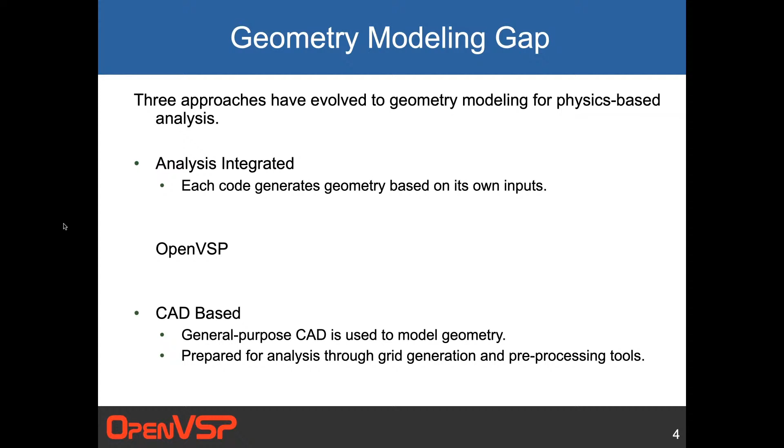Now, there's also typically in practice a lot of analysis fidelity holes, and there's many reasons why this exists in practice and in industry, but for the most part, an organization will invest tremendous effort in getting a single model to analysis workflow working, and there's huge investments in that, and your fidelity is at least limited, if not chosen, by the geometry model you have, and it's hard to change that fidelity later.

And so what this means is that a design engineer ends up choosing the analysis tool that they're using, not based on what's the right tool for a given job, but by which tool is fully automated and integrated in our workflow? Which tool do I have the most investment in? And then every time you need to use something, you end up using that same tool.

And what you end up with is, instead of a densely populated fidelity discipline matrix where you have multiple fidelity choices you can make at every discipline throughout the design process, you've just got one here and there. And due to those sparse choices, you don't get to make the right tool choice independently as you're working.

Now, there's many possible representations of a geometry. Again, in CAD, there's just sort of one representation. But there's many ways as engineers we think about the shapes. You might represent a wing as a stack up of its airfoils, or maybe a wireframe, or maybe a smooth surface representation. It might be an unstructured isotropic triangle mesh. It might be a coarse triangle mesh.

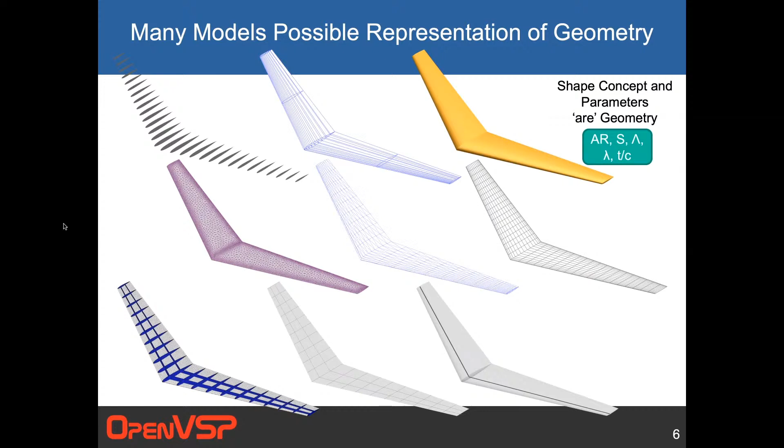And in VSP, the true geometry is the parameters, the aspect ratio, the area, the sweep angle, the taper ratio, the thickness to chord. These parameters are the geometry. And from that, we generate these different shapes. And that's a little bit different than the way CAD would work.

Now, representation has a lot to do with the fidelity of analysis you might use. A thin potato chip type representation for a vortex lattice, a surface model for a panel code, an unstructured surface mesh for CFD that then grows to a volume mesh. And this representation very much has to do with the fidelity of the tool, but fidelity does not necessarily correlate directly to the design stage. And this is a mistake, a confusion that a lot of people have.

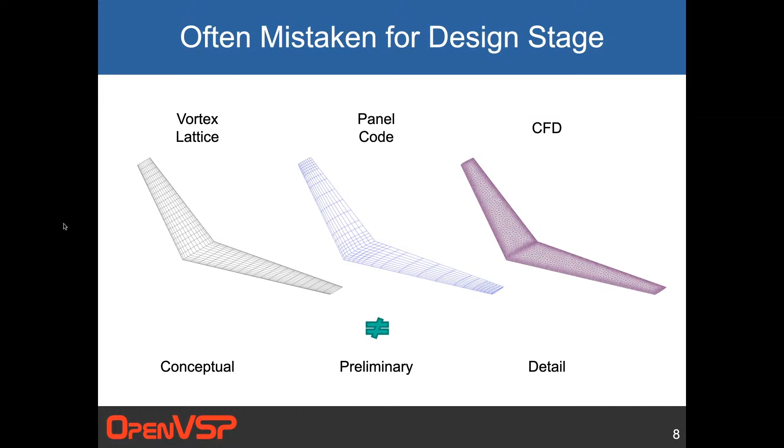But the fidelity does not increase monotonically as you go through design. Sometimes you need to use a high fidelity tool early in conceptual design, and sometimes it's entirely appropriate to use a low fidelity tool very late in the detailed design process. And although that may seem counterintuitive and people don't realize it, this is a well-established idea.

In the preliminary design, the parameters get a little bit more detailed. The requirements get more detailed. You're making more subtle choices, camber, twist distribution. You're looking at the major loads and stresses. You're zooming in a bit. And then finally over to detailed design, where you're going all the way to what it takes to actually produce and make. And you're looking at all of the very detailed stresses and the final stage.

And as I said, you might need to use a high fidelity tool in phase one. There may be parts of a design that need CFD in phase one, in the conceptual design. At the same time, when you're doing the local strength requirements, it might be appropriate to use handbook methods and just a sharp pencil and paper to do stress calculations, a very low fidelity tool in the detailed design phase. And we need to break this idea that fidelity increases monotonically with the phase of design. We need to be able to choose these independently.

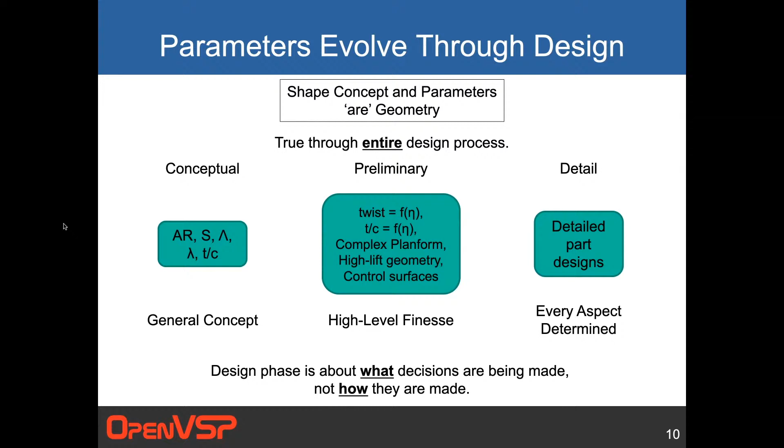In conceptual design, we have these high-level parameters with the general concept. In preliminary, we get some more finesse, things get a bit more detailed. And then in detailed design, every aspect is determined. Things really go further. VSP is totally appropriate, I believe, through the conceptual and into the preliminary design process. At some point in the preliminary to detail, it's appropriate to switch to CAD and not use VSP as your primary model. You may still use it for some of your analyses, but it's a point in time when you need to switch over. And again, the design phase you're in is about what decisions are being made, not how they're made.

VSP has come a long way over the years. I hope that introduction gets everybody warmed up and ready for this workshop. This is our 8th workshop. I don't know how many of you have been to them in the past, but VSP has been evolving at a rapid pace throughout these workshops and the years before. And we're now up to version 3.21.2.

At last year's workshop, we were at 3.18, and you can see this history going back. I will say that the development pace has been very, very fast. We've been making some progress here at Cal Poly. Justin Gravitt and his team at ESAero deserve a lot of credit for carrying the torch in development over these last couple of years through the SBIR they have with the Air Force.

I'd implore you to look at what version of VSP you're running. And if you're not running version 3.21.2, ask yourself why. And if there's not a really good reason, go ahead and update. There's many bugs fixed in every version, many features introduced. Obviously, only the newest version gets any support at all. So please update. There's no reason not to.

Since last year's workshop, here's a summary of the features that have been introduced. These are just the biggest, heaviest hitters. We'll be talking about a lot of these throughout the workshop, but one of my favorites is the smart input capability, where you can do simple math on the fly in VSP text entry boxes. We have the generic XSec capability so that you can have infinite flexibility on cross sections. VSP Aero has received major updates so that it now does fully general unsteady motion, including rotating blades. The GUI support in VSP itself for VSP Aero has been updated to support rotating blades and unsteady motion.

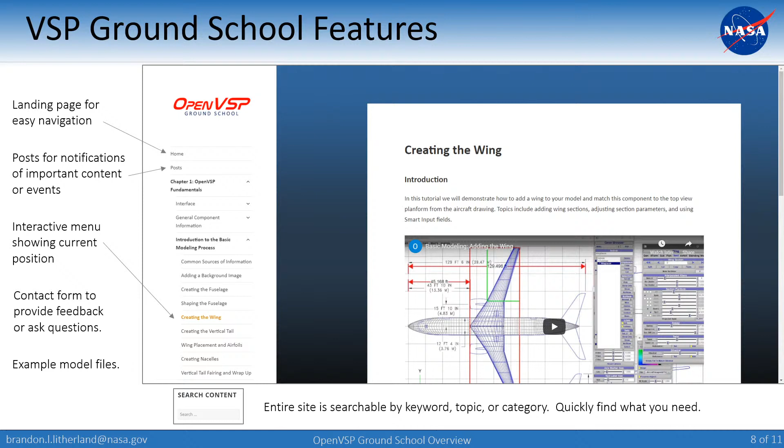Another handy feature is that this website is responsive, so it works with monitors and displays, tablets, or smartphones and other smart devices. Because it's designed to work this way, it uses active commands rather than the hover issue on mobile devices. So instead of having a menu where you hover and click on things, you actually have to interact with it in order for it to execute a command. This is not only useful for mobile devices and mobile menus, but it's also very accessible to folks who might have motor control issues, hearing problems, or visual impairments.

The VSP training website is only going to execute a command if you find it and tell it to do so. So it's really accessible, easy to use, and very intuitive.

Some things coming down the pipe pretty soon in the near term are fixing the subscription service notifications. Some of them work, but some email providers are filtering out emails from the website, and we're trying to get that chased down so that if you like, you can subscribe to the training material and it will send you a notification when new content is added. We'll also be wrapping up all of the Chapter 1 material in the fundamentals.

Over the next year, we're going to drastically increase production of content for Chapters 2 through 5, including a heavy focus on analyses and design intent. Expect a lot of material on VSP Aero, structures, getting things ready for CFD, and how to set up your model parametrically and link things together. We also want to start writing detailed procedures for those who don't want to follow along on a video and prefer to have it written out, and we'll put together practice exercises so you can exercise those core topics and reinforce learning.

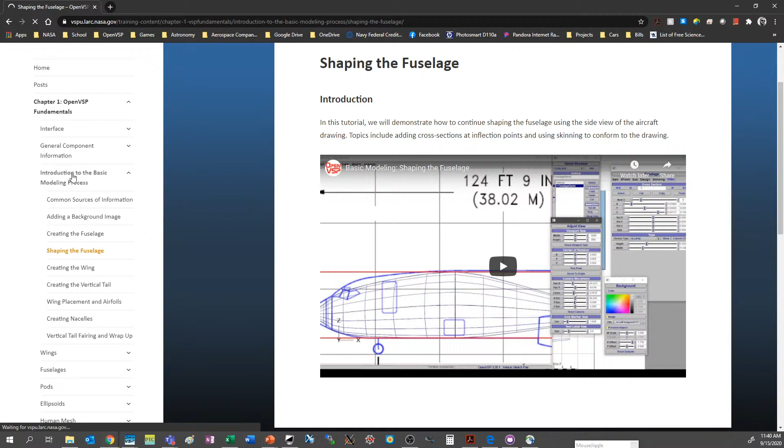And if you want to go, you can go to some of these subject or chapter processes. And if you just want to see what's inside, you can go there. And all of these have a summary of all of the various topics inside that chapter, as well as a link to all the other subjects in this chapter. So it's really easy to navigate around and see what you can get into.

But something else I wanted to demonstrate is that the website is, in fact, responsive. So if you drag the size of this to something quite small, you can see what it would look like in a mobile view. If you move it around and make it wider, that's what it would look like in a tablet, and here's your desktop view. So this website will respond to the size of the screen that you're looking at in real time, and it will set it up to have the best viewing experience for you. Drop the hamburger menu down, and again, it shows you where you are in the training.

So, I hope that was really useful. We're really proud of the Ground School website, and we know that it's got a ways to go. We're still working on getting that up and running, but hopefully everybody is able to use that. And what I'm going to do now is get ready to set up for the basic modeling tutorial, but I'm going to pause in case there are any questions. Rob or Justin, if there are some that you see that they need to ask, by all means let me know on the Teams meeting here, and I'll address that while I'm getting this set up.

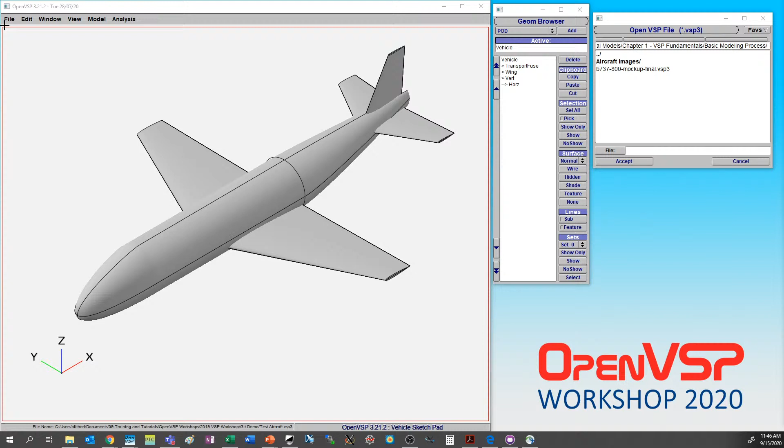So what we're going to do is take a quick look at what the aircraft would eventually look like here. Now, if we fit this to screen, this just happens to be an example transport aircraft that we pulled from online and publicly available information. So you can do measurements and you can match it. And it's an okay model. It's not perfect. It's certainly not to the CAD level, but for an OpenVSP model, this one isn't too bad.

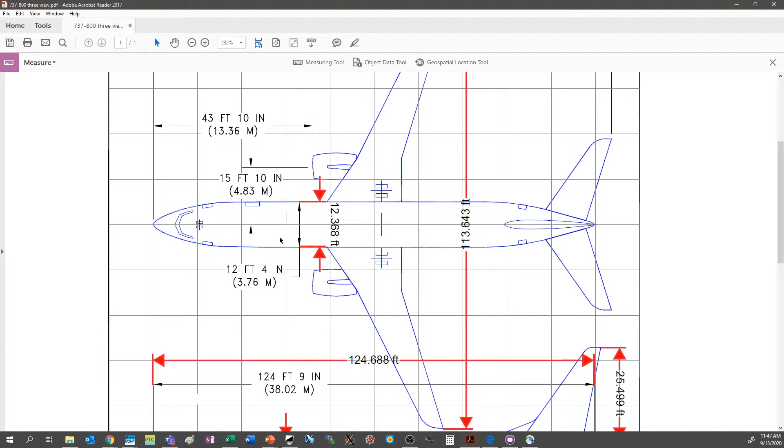So what we're going to do is just make a new model and start looking at how you would even begin to model something like this. And usually a great place to start is to find some publicly available information on the layout of your aircraft. Now in this case, I've pulled out a 3-view drawing of the aircraft, and in Adobe Reader, you have a measuring tool where you can click and drag and figure out measurements as long as everything is set to scale.

Now the way that you can do that is when you open it up, you go to your tools and a measure tool. You actually have to turn this on, and then you have various types and you'll get this crosshair. So if we were to click at this measurement point and drag this over, and you can hold shift, you can see that we can get something pretty close to what's documented. Now the reason that's already coming out this way is because I've set the scale.

So if we right click out here, you can say change scale ratio and precision, and you can see that my scale ratio is currently the measured 3 inches that it'll show you the first time you do this on your page, and you can set it to the dimension that you want. Now this is going to have a certain precision, and you can start to use this 3-view drawing to pull out dimensions in your model. So this is a really great place to begin.

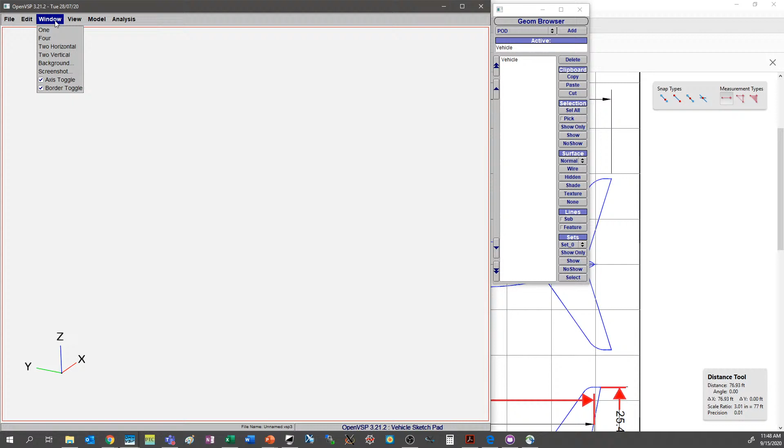Another really nice thing that we can do, if we go back to our VSP model, is we can go to Window and Background, and we can pick an image. So let's say we want to start with a top view. Okay, this isn't too bad. We have a nice outline of the fuselage. We've got our wing, our engines, our tails, everything's laid out for us. And if we want, we can add different background views.

So before we even add a component, I want to give a quick word on how you can interact with your workspace in a way that makes it very effective. So if you need to, you can scale these and make them bigger or smaller. If you happen to find that perhaps the image itself is not using the correct dimensions in one or the other because either it didn't come into the PDF correctly or a dimension is wrong, you can also give a different scale in width and height.

Now, if you go to Window, you can see that you have the option of 1 workspace or 4, 2, and 2. If you break this up into 4 workspaces, and we have all of these here, notice that everything cleared out, but this red box designates your active window. If you click Image, it's now going to put 1 image here.

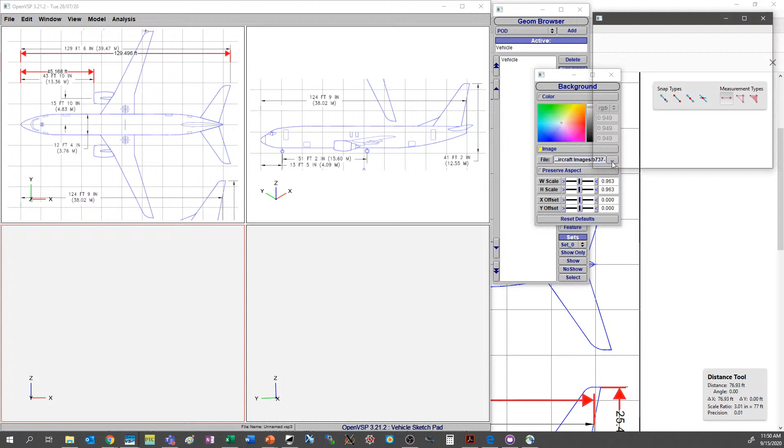You can click Image, and we can set this one, let's say, to a side view. Okay, we're happy there. Let's do this one. We want to do a front view. So you can see that the scale is a little bit different here because it got a hold of the background and it kind of smashed it because I told it to not preserve the aspect. We can fix that stuff later, but the point is that for each one of these active workspaces, you have control as if it was its own workspace.

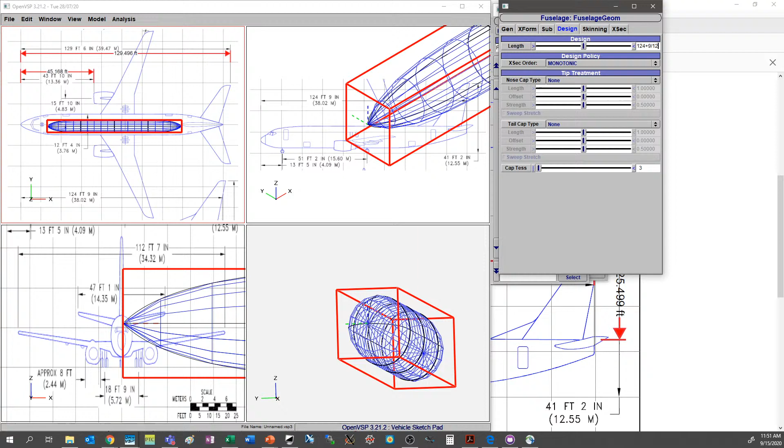So in this first, let's go ahead and add a fuselage component, and we're going to jump to a top view and try and line this up. Now, based on our model here, we know that our fuselage length is 124 feet and 9 inches. Okay, that's all well and good. Let's go to our fuselage design. We're going to say 124 feet plus 9 by 12 because you can do smart input math in the parameters now. Press enter and you have it the correct size.

And now we can start to line this up as needed. And then we can start playing around with cross sections because now we know one dimension lines up with the view that we want. We can start pushing cross sections around. We can start shaping it by hand if we want. So since I've shown you how to manipulate these in a 4-window scheme, let's go ahead and go back to a single window. And now we can kind of see a little bit more detail of what's going on.

So I am going to try and do this with my mouse, but let's say it doesn't like me very well and it's a little clunky. You can always go to View, Adjust, and you can take your zoom, collapse this down a little bit, and you can get some nice fine zoom control over this part and line it up just where you want to. Okay? So at this point, let's go ahead and get rid of Adjust View, go to the cross-section window, and start to play with a few of these.

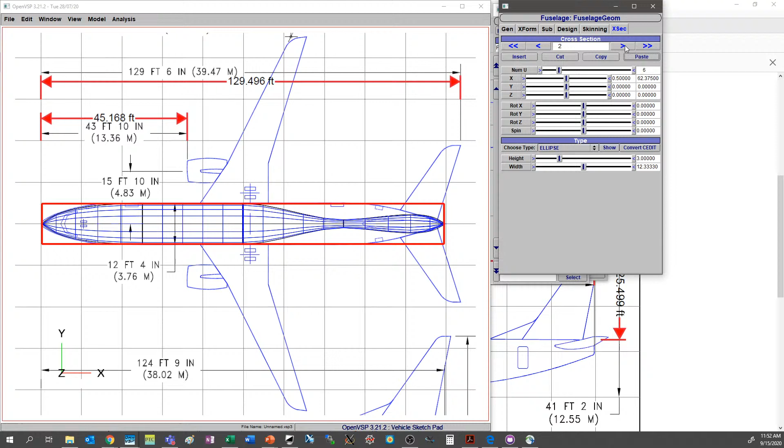So I'm going to start adjusting the width. And the nice thing is the width is given to me. It's 12 feet 4 inches. So I can just simply say 12.3333 and we're good. Go to the next one or even copy and paste. Okay, we're going to paste again. So now we have a nice width. We can play around with some of the skinning to get things to line up, but we're starting to get there. So next, let's go ahead and change the background to a side view.

And we're going to line this up again. We're going to jump to a left-hand view, set things up, maybe give it a little bit of zoom to try and line these things up. And we're just going to continue on. So if we adjust, we're going to move our zoom around a little bit, get things mostly lined up. And the point here is to just show you about what to do, not to really worry about all the little fiddly things. So we're going to go ahead and move this around. And for each of these cross sections, we're going to start to place where they need to go.

So let's say that for this one, we want to set our height. Let's give this a bit of positive Z. That's too open. If you click these little collapsible caret icons to either side of your slider, that's going to collapse the range. So you can see now that this is moving much more slowly than when I originally had it. So now I can do that, give it a bit more height. All right, now we're getting closer, and that's about 13 feet. That's not too bad. So let's go ahead and set these to 13 feet as well. Give it some Z.

Okay, looking pretty good. All right, so rather than go through all the little details of trying to get the fuselage exactly right, I think by now you get the idea. So we're going to leave the fuselage and we're going to start dealing with how to shape a wing. So in this case, what we're going to do is, as a child of the fuselage geometry, you see we have it selected there. We're going to click on wing and we're going to add.

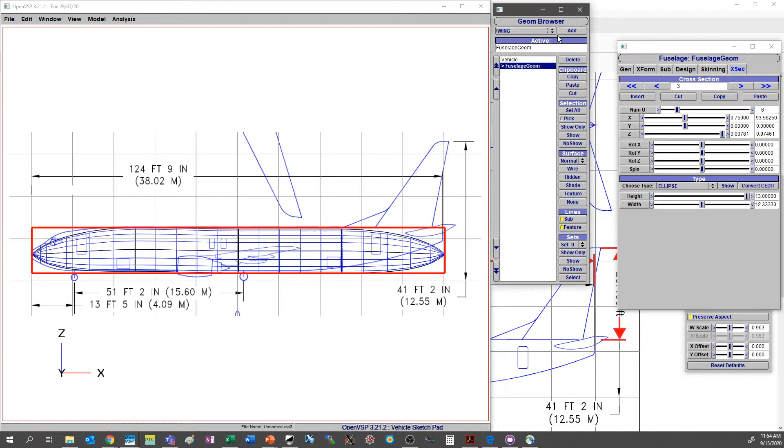And just because we want to, we're going to say that it's attached to this parent in the component location, and we're going to leave the rotation alone. So let's go ahead and press F5, jump to a top view, and we're going to adjust our background here and bring up that top view again. So now we've got our model lined up and we can start to think about placing our wing.

So as a quick word and a little tip in VSP, if you have a custom view that you really like, say for example a zoom and a rotation that fits your background exactly the way you want to, you can hold Shift and press F1, F2, F3, or F4, and OpenVSP is going to remember that camera orientation, including the zoom and the center of reference for you. So you can press F1, F2, F3, F4 and quickly snap back to that preset view.

If you have 2 or 4 of these workspaces open, you can have up to 16 different saved views because, again, each one of those workspaces treats itself as if it's its own workspace. Okay? So that's a handy little trick for when you want to jump around and get a nice clean view.

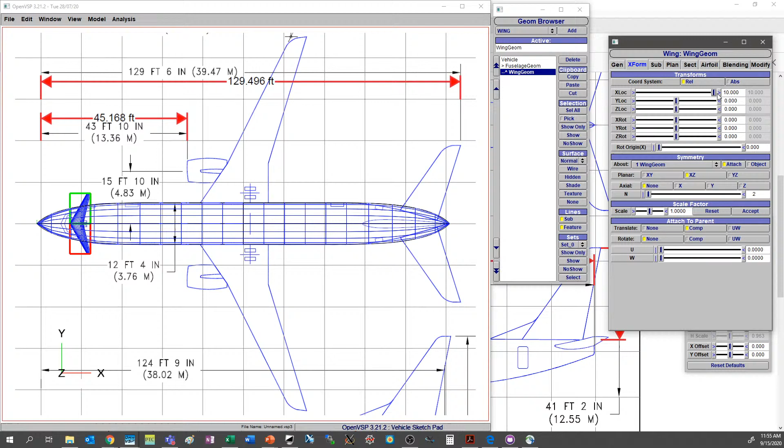So in this case, we're going to go ahead and start moving this wing back to where we think it needs to go. And if we look at our reference drawing, our wingspan from tip to tip should be about 113.6. So that's as measured. In this case, it's saying it's 112 feet 7 inches from tip to tip. So let's use the reference drawing rather than what the measurement on the paper says.

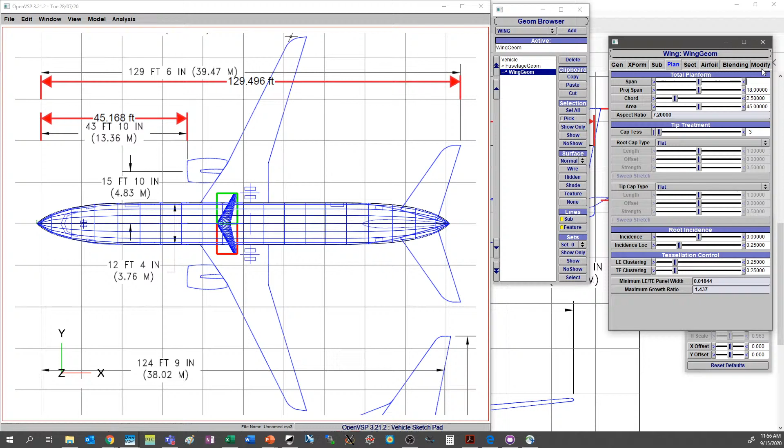So we're going to set our wingspan under plan. We're going to say it's 112 feet and 7 inches. Okay. So let's do parenthesis, 112 feet plus 7 twelfths, close parenthesis, divided by, I apologize, 112 feet plus 7 twelfths for the total span. In the section span, you would have divided that by 2 because it's only dealing with this right-hand side. But we didn't have to do that, we were doing span.

So now we can place this about where it needs to go. And obviously we need a multi-section wing. So let's go here and split. And if we start moving this span back some, now is where we have to start figuring out what the total span needs to be. In this case, let's just eyeball it. That looks good enough. So transform, we're going to move this up.

We're going to give this first section a little bit more sweep. And note here we're controlling the sweep about the 0 location. That's the leading edge. We can set this back and control trailing edge sweep if we want to. But for now, let's go ahead and start dragging back. Give this some extra root chord. Perhaps something more like, it's probably about 26, 27 feet, maybe 25. 25 looks good. Let's do that.

And then the tip chord, we can just increase until it looks about right. So maybe 12.5. Not too bad. So let's come out to section 2. Again, maybe we have a little bit too much sweep. Let's back that off a little bit and give it some tip chord. All right. So in a relatively short time, we have a wing that looks like it has about the same plan form that it's supposed to have based on the 3-view drawing.

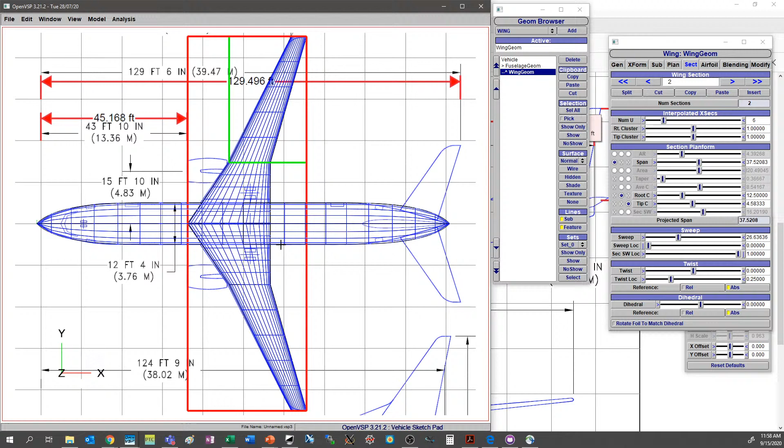So from here, if we want, we can go ahead and further modify this wing. Let's say we want a front view. And again, let's come to our image and go to a front view. And then we can start placing things where we can start to adjust maybe the thickness, give it some dihedral, and do that. So here, let's go to the Transform tab. We're going to lower this wing just a little bit to maybe there. Looks pretty good. And if we come out to section 2, we can start to give this some dihedral.

Now, you'll notice that even though I left everything the same, because I jumped to a different view, my zoom changed. So again, kind of like earlier, I need to tweak this zoom so that everything lines up a little bit better.

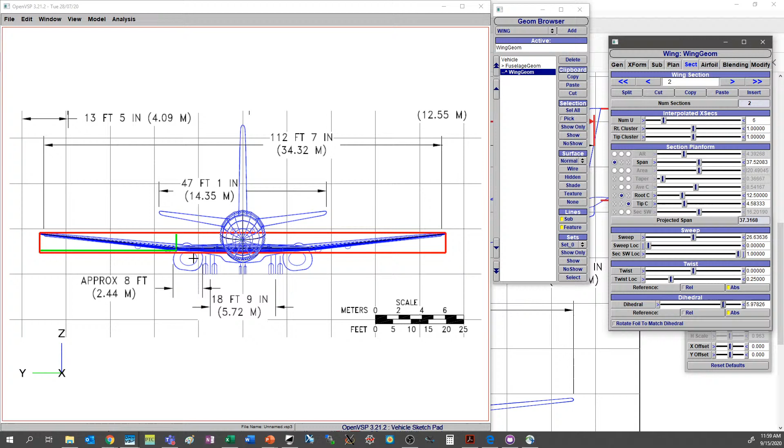But for the most part, you get the idea that you can set these up, line things up, and then kind of by hand manipulate these models until they get you what you need. So based on the front profile, it looks like our thickness to chord is okay down near the root and at the tip. And if we want to modify things even further, we can come to the airfoil tab,

and you'll notice that each of these has a NACA 4 series. In this case, we're using a NACA 0010 pretty much everywhere. We don't have to do that. You can use any one of these different cross-section types to define this airfoil, or you can set things to an airfoil file. Now, VSP is packaged with airfoil files. You can just come here to airfoils, and here's a nice list of already included airfoils.

So let's say we want 737A airfoil. Click OK. And if you click Show, you can see what that airfoil looks like in the cross-section view window. So you'll notice here that this root section got pretty beefy. And really what we need to do would be to drop this down a little bit more, set that other cross-section airfoil to be correct here, and then modify things accordingly as we move out. But that is how you can come in and modify airfoils in a wing and adjust things.

If you happen to know, for example, what your root incidence happens to be, you can give this some root incidence. And if we zoom in, and perhaps let's just get rid of the background, because at this point I think you can see how to manipulate these models, how to match things to a background view and use reference dimensions. Let's just see what changing some of these other parameters does for you. And with some time remaining closer to maybe quarter past the hour as we transition to our next, we can go ahead and answer some of these basic modeling questions that you have.

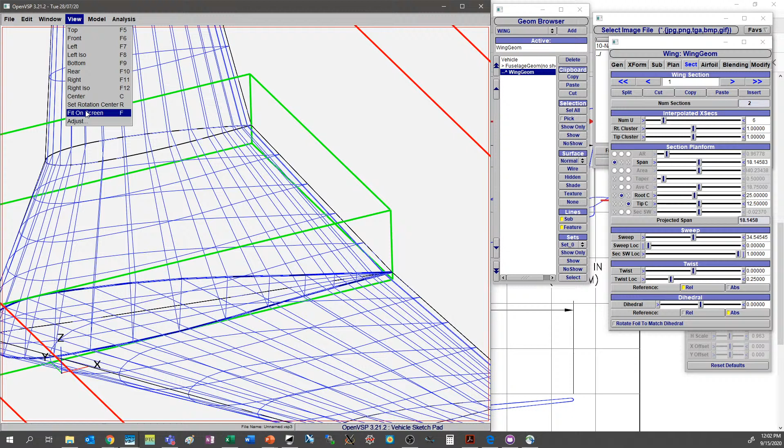If you go to the view, you might notice that you can do center, set rotation center, or fit on screen. So I'm going to press R and choose that trailing edge point as my center of rotation. Now I can keep that centered and rotate around and see what I want to see, no matter how closely I'm zoomed in. So while I'm doing this, notice that if I go back to absolute, that airfoil goes back to a 0 incidence relative to the global frame. If I tell it relative, it's at 4 degrees and it's 0 relative to the previous cross-section.

So this is an important distinction when you're modeling things like the twist in your wings: do you want to add some delta twist so that you can prescribe how it moves relative to the root, or do you want to be able to prescribe it relative to your X direction or wherever the orientation of your wing happens to be? Because you can combine things like twist, come to transform, and give it some rotation about the Y-axis, and the whole geometry will rotate, but the twist is still the twist.

So try and keep that stuff in mind, that when you start combining rotations and transformations and things like that, whatever orientation it is with the free stream direction or with your global X, Y, and Z may be slightly different because you're starting to combine rotations.

So because we went ahead and did that with twist, I want you to also notice that dihedral has the same flag. Back here at the root, we've told it that we want 0 absolute dihedral. Out here in the second section, we gave it about 5 positive.

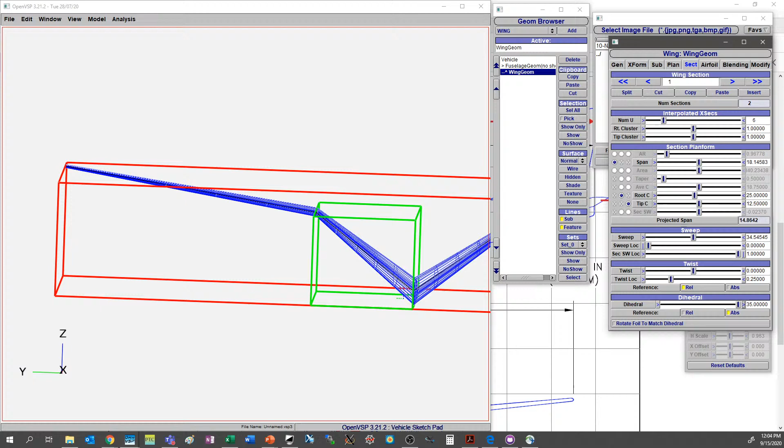Another thing, since we're talking about dihedral, that we really need to pay attention to is this flag that says rotate foil to match dihedral. This is really nice to use, particularly if you're doing something like modifying winglets or trying to put something with a high degree of dihedral and rotation out at the wingtip. Something like a blended wing would benefit from this a lot.

But if we turn this on, it's important to note that here at the center, these two, if you're modeling, need to be vertical. You need to have these things nice and closed. If we were to start to rotate, watch what happens.

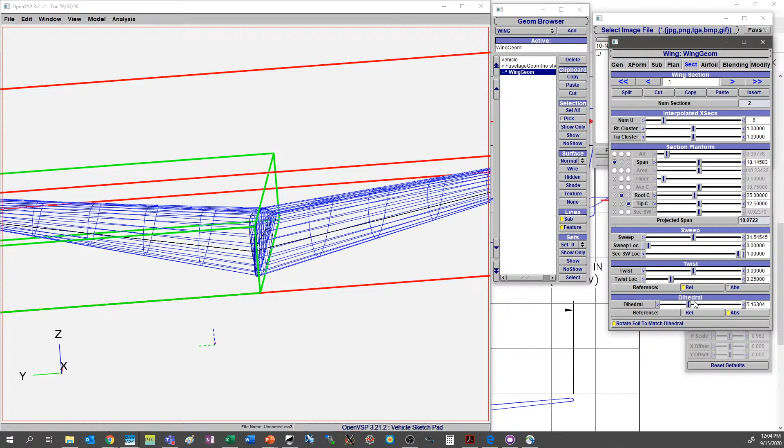So because I gave it a lot of dihedral, you can see what's going on here at the root. These two have separated and overlapped. And if you try and run this through VSP Aero or a different solver, it's not going to like this at all.

So the way to get around that, if you do want to rotate your foils to match dihedral, all you do is put in a very short span section here with 0 dihedral, and build off of that. That's going to maintain this center cross section nice and parallel to each other and closed, and you can give yourself relative dihedral as you move outboard.

So for now, you notice if we turn that off, all of these different cross sections are all vertical, and that keeps everything tight. So for small dihedral, the small angle approximation means that everything is probably okay. You're not really changing the thickness all that much. But if you give it a whole lot, notice how the thickness is prescribed here.

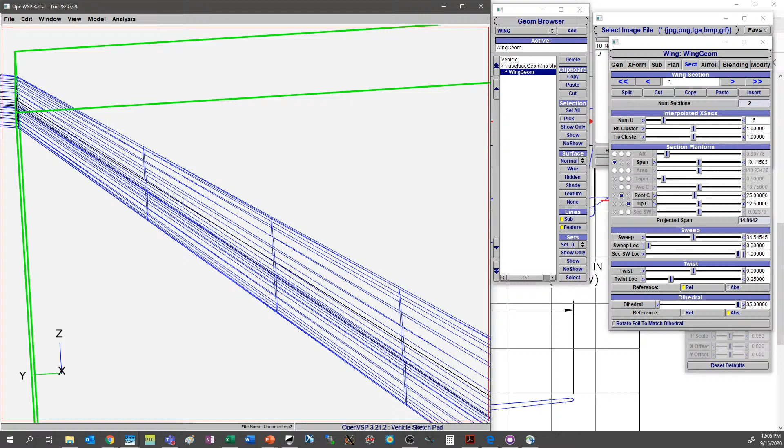If we turn this on, it makes the wing thicker, and that's because it's using this perpendicular section here. So bear in mind that the decisions you make in your model, say if you were using this as a V-tail, make a difference to the size of the wing and the thickness of the wing. So pay attention to what you're doing when you're putting this stuff together.

And while we're on the subject of how to build a tail, let's say we want to show our model and put a vertical tail in this. The way you do that, we're just going to add a wing, come to transform, and turn off XZ symmetry because we don't need this other side. If we rotate about X in the positive direction using the right hand rule and give that 90 degrees, we now have a nice vertical wing section that we can use as a tail.

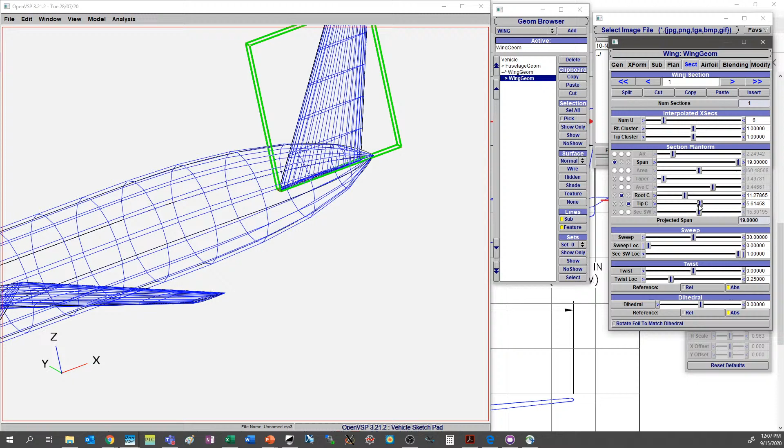So in that case, we're just going to take this and drag it way back in X until we're somewhere near the tail. This is just a piece of the default wing, but we can make it much bigger very easily. Let's just give it more span, give it some root and some tip, maybe back off on the sweep a little bit. Okay, so there's your vertical tail.

It's as easy as that, but with a vertical tail, remember, don't leave XZ symmetry activated. If I turn this on or off, it's really hard to see if anything's happening. But what's actually going on, if we back this off a little bit, you can see there are two coincident surfaces right on top of each other, and that's going to cause all sorts of problems with your solvers or your geometry down the road. With anything you're trying to make a vertical surface like that, do not reflect about XZ.

Now, it's all well and good if you're going to have an offset vertical tail to try and make something like an H-tail. Yeah, go ahead, leave XZ symmetry on. Make sure that it's about either the global origin, the wing geom itself, or the fuselage geometry. But make sure that your plane of symmetry is correct about the correct reference.

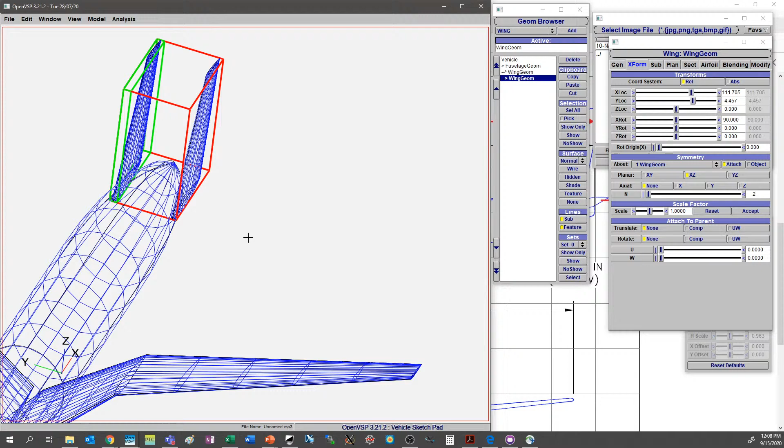So that is how we can go about modeling wing and a fuselage. I know we didn't really go into a lot of the details on how to exactly fit everything. And since we have a little bit of time to go back and look at the fuselage some more, I want to show you some behaviors of skinning.

So in the time that we have, I'm going to bring the background back up, and I'm going to go to that side view so that we can demonstrate a little bit of skinning and how we can do this. So let's jump to a left view, try and set everything up to have an okay zoom level. It doesn't have to be perfect, but let's just demonstrate what we would do.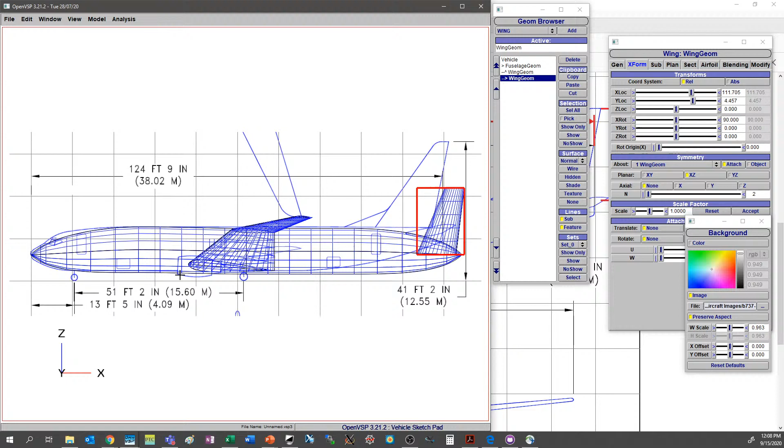So I'm going to go ahead and hide these two components and then jump to fuselage, and we'll come here to say cross section 1. Now you can see down here on the bottom that we're kind of matching what we want, but let's come to the general tab, give this maybe a few extra cross sections, and then let this have some more interpolated sections in between this and this point.

Now we can kind of see that we're missing out on some of the details here, and we certainly aren't capturing the top of the cabin here. So we can either add a new cross section here and then move everything over, or we can try and just approximate it as best we can. Let's come to skinning and just see what we can see.

We know that the top and bottom aren't going to be exactly the same, so we can deactivate top and bottom symmetry, and that gives us control over our angle, slew, and strength parameters.

So let's start with the top and go all the way back to the point at our first cross section. We see that it's set to 45, maybe let's bump this up to 90. But that might have been a bit too strong, but the point is that we can just back this off a little bit. So instead of 0.37, let's make this down to, I don't know, about 0.2. Maybe that's not enough. 0.3. Okay, so we're starting to get there.

If we come to, let's just go ahead and set this nice and even so we keep our right and left. And now we can start to adjust the strength on our top side. So strength is going to push this out further and further. There's a nice talk on skinning that explains exactly how all this stuff works in detail, but this is just a quick demonstration on what some of them do.

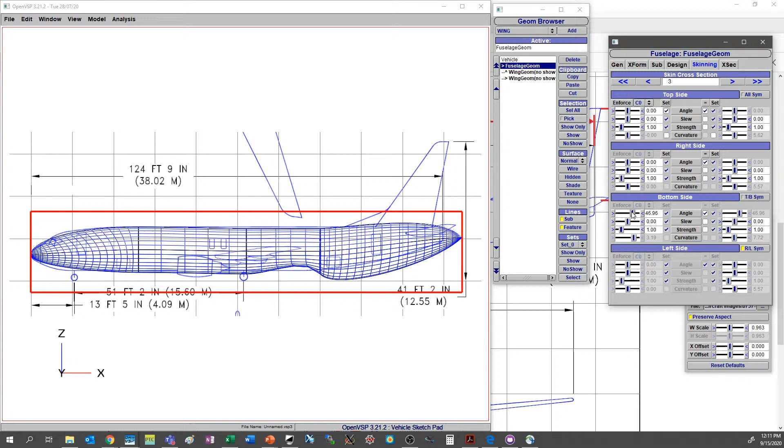And here, let's start playing around with the angle a little bit. So again, turn top and bottom off, and what we're going to do is adjust the angle. So in this case, you can see that changing the angle is going to change how that feature line passes through that control point in the model.

And the trick is here that if we know we want it to be 0 on the left, but slightly different on the right, we can turn off this equal sign, and now we can have this be only controlled on one side. So if you happen to know that it's a discontinuity in the angle here, you can set those to be unequal and let it ride. So again, you can adjust your strength, piece everything together as needed.

But you can see how if you were to add a cross section here, control your skinning on the top and bottom, and you'll do the same thing for the left and right. It's just a trick of trying to get the closest approximation to this surface using as few control stations as possible. Because you don't need to go in and put 25 different cross sections in here.

You just need to have maybe 3 or 4 stations where the geometry starts to change and use skinning to accomplish the rest. And you're going to get a much smoother surface and a really representative surface if you approach it that way.

So hopefully that explains a bit of basic modeling and how to manipulate wing geometries and fuselage geometries, how to adjust your skinning, and some things to watch out for when doing things like vertical tails, adjusting dihedral, etc. The basic modeling tutorial in the ground school goes into a lot greater detail and walks you through how to build up that 737 model.

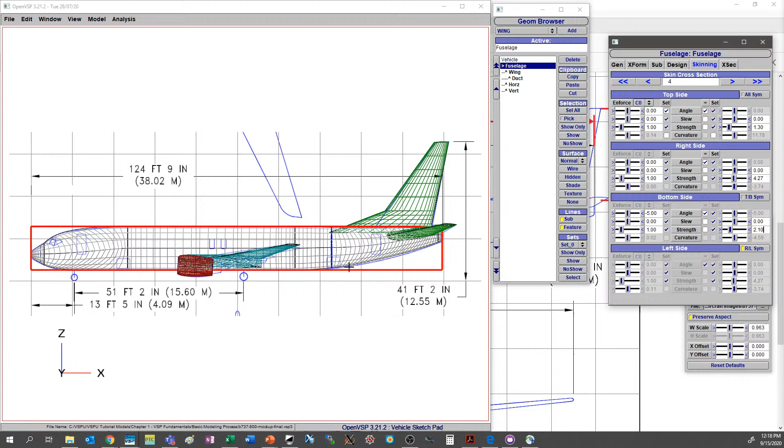But for the time being, just realize that as we're adjusting the strength of these, you notice that you get closer and closer. You can actually set this to 0. And that's taking all of these sections as you move back and it's slamming them up against this cross section. And that's going to cause you problems down the road. If you need something to have a zero strength skinning loft, it's a lot better to just deactivate it entirely.

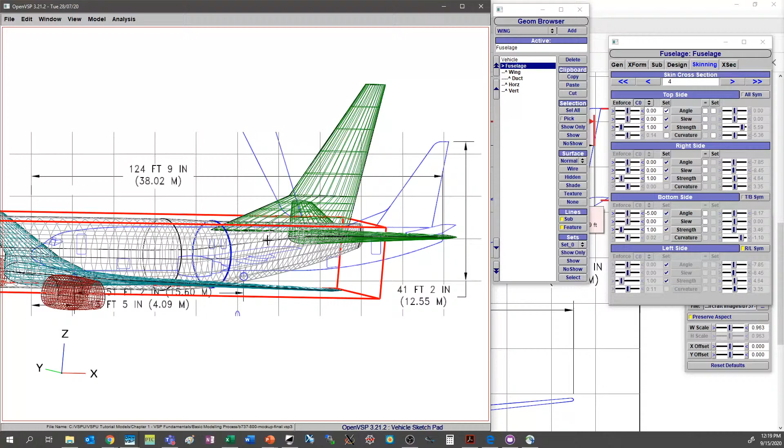So if you just turn off set, it's going to do a direct linear loft in between these components, and you can see that there's no motion, there's no smooth lofting. If we move this around, this is just a straight line from here back to here. So again, if we press R and center this and kind of move it around, it's still not bad, but there's no elegant smooth skinning going on. It's just drawing straight lines and it's smashing everything together. So don't use zero strength skinning is usually the mantra that we go with.

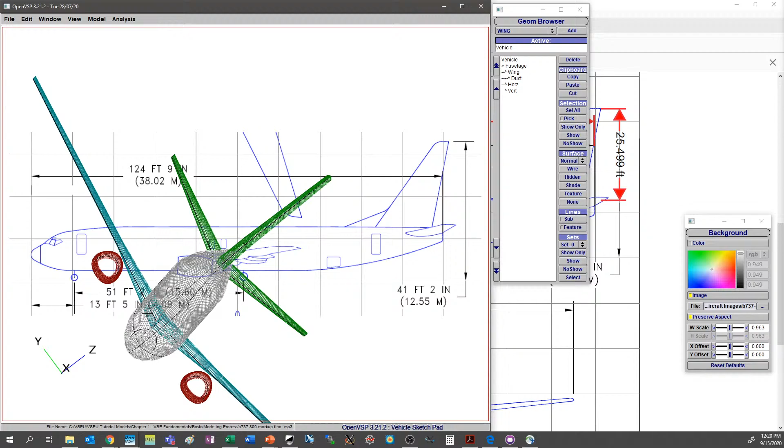Someone asked, assuming that you're designing a V-tail, is the sweep angle measured from the XZ projected profile, or is the sweep angle measured from the plane of the V-tail itself? So the sweep angle in any of your wing components is just going to be that line along the leading edge relative to the geometry. So, like if we rotate it in dihedral or rotate it in Y, it would be like if you're looking at a normal view to the wing. And Rob, if I'm misspeaking here, by all means, correct me. But at least in my experience, I think that's the way it behaves. It treats the sweep as if it's the component.

Yeah, I actually think the answer in the way the question was asked is the second one. It's measured in the plane of the tail itself. Right. The wing is swept back and then it's rotated to put in either the dihedral or if you rotate about the x-axis. Yeah. And so thank you on that. So I think it's been understood.

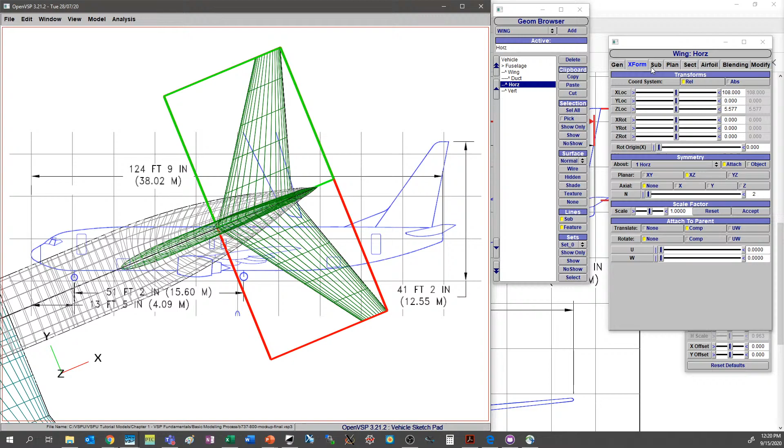Good. We had another question that was pretty in depth, and I'm going to try and address it. It's been asked on the NASA side. I'll try and summarize it because it's a very long question, and I think it's probably asked by Cal Weller. So the question is about some of the details of the skinning algorithm, and how does OpenVSP differentiate between top, bottom, left, and right curves? And is it interpolated in the U value around the circle from 0 to 0.25 like that? And I'll say that basically, yes, it is. The top, bottom, left, right is specifying the quantity of interest at the 0, 0.25, 0.5, 0.75 U values.

So at those quarter values of U, it's mentioned what happens if you rotate that cross section. What happens if you spin it versus rotate it? I think spinning versus rotating about X will have different results. Spinning should just take that shape and reparameterize it, so it just shifts where the 0 point is in that U parameterization, and so what you may want to do is rotate and then shift back.

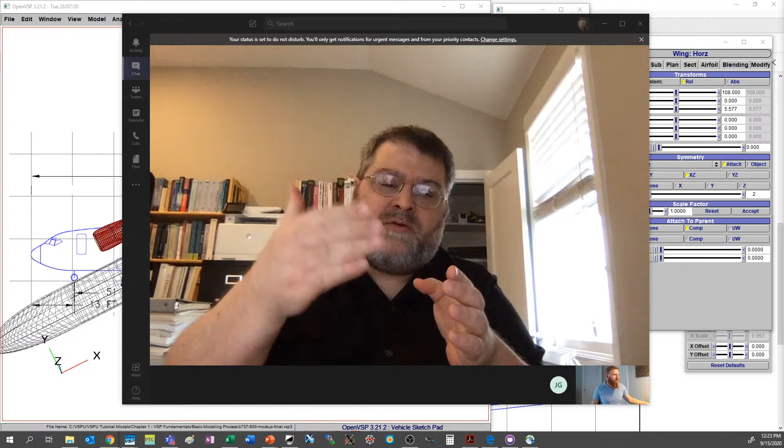The way VSP does the skinning is we lay out that curve. So you can think of at a cross section, there's a curve in 3D space that exists. And then what we do is we also build a curve for the first derivative of the surface at that location. And then we also build a curve for the second derivative of the surface at that location.

And there's, of course, in front of the section and behind the section. So we'll actually have to build a first derivative curve in front of and behind the section if those are different. And of course, the first derivative in 3D space means that it's a vector. So it's a curve of the x component of the derivative, the y component of the derivative, and the z component of the derivative. And when we're skinning, we only care about the derivative down nose to tail. So that would be the u or the v, whichever one is not around the circle.

So what we do is we have XYZ curves of the position, and then we have XYZ derivative curves, and then we have curvature curves. And those curves at each end of a section are used to specify the shape. And that's what we then do the math to loft the surface between them. So in particular, when we lay out a curve and we know at that top, bottom, left, right point, which are at the 0, 0.25, 0.5, and 0.75 points, we know the three-dimensional, what we want that vector to be, right?

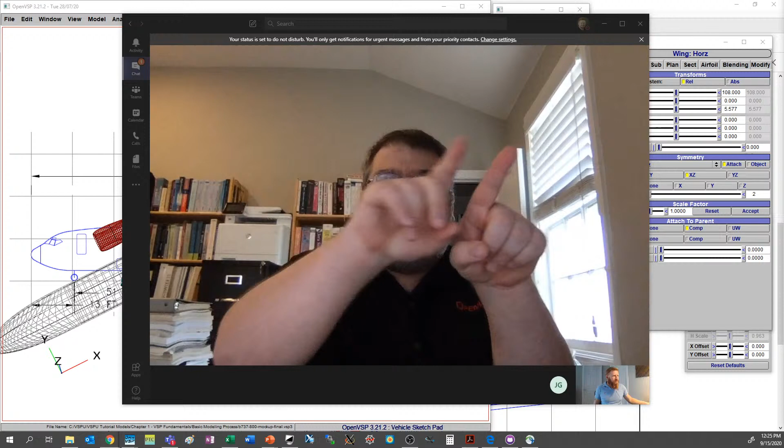But for all those points in between, from 0 to 0.25 to 0.5, we're going to linearly vary. So if the vector points in this direction in 3D space at 0, as you move to 0.25 and it points in this space, we're going to linearly vary that vector and create a bunch of vectors all along. And so we end up with a continuous specification of the derivative all the way around, and that's what's used to loft. And I know that that's a deep in the weeds answer, but hopefully that's helpful.

This presentation has a lot to it, and we'll start with a bunch of slides that I hope will make everything clear. And if we have enough time, we'll try and do a quick live demo that will demonstrate a bunch of these features. And this is sort of a grab bag of features that allow you to better set up your models to capture the designer's intent, and that allow you to organize your models in better ways. And so we'll be talking about attachment, hinges, symmetry, sets, and subsurfaces. So without further ado,

each component in OpenVSP is placed in the world based on its attachment point. And so what you'll see when you add a component, there's the global orientation shown down in the corner. And anytime we show one of these orientation triads, we use the colors red, green, blue to represent X, Y, Z in that order. So even though it's not labeled, this dash triad, you see red, green, blue, you know that's the X, Y, Z location.

In this case, this pod is positioned relative to its attachment point. And when you position a pod with a relative button, that's what it's saying. We are 2 units in the X and 2 units in the Z relative to its attachment point. Normally, of course, the default is 0, 0. So when a component gets added, its attachment point is drawn right at its nose. And then what you can do is move a pod relative to its attachment point. And then, of course, attachment allows you to move where the attachment point is.

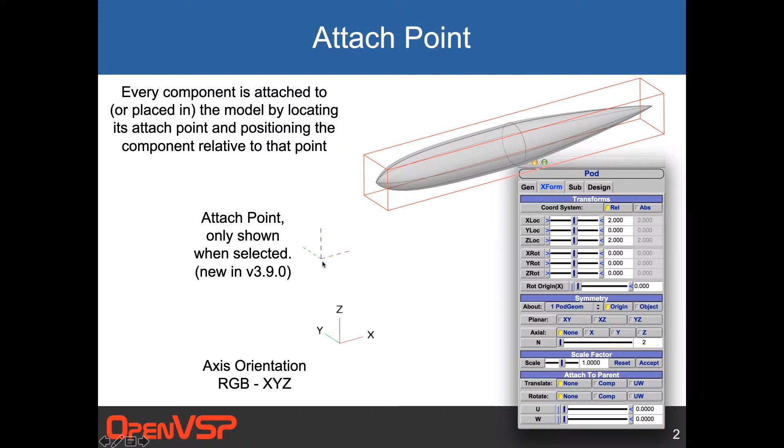When you place components in the tree, in the Geom browser tree, what you'll see is you can place them in a hierarchy. So you can make a component a child of another component. And when you do that, you then have the option of attaching it to a parent. You don't have to. You can just use the tree for organization, but you can also use the tree for attachment. And so you can only attach to a parent.

Your choices here are none, attach it to the component coordinate system, or attach it to UW. We'll talk a little bit more about what that means in a moment. But so we've attached, and then you can separately choose to attach translations and rotations. In this case, both are attached to the component system, and then it's moved relative to that to 2, 2. So that's why it's not located at its dashed triad.

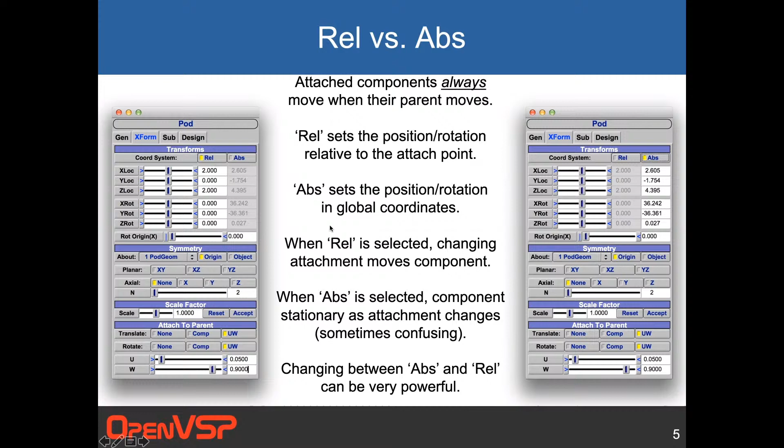And that'll become more clear when you play with it or when I do the demo. There's a special kind of component in OpenVSP called a blank, and there's no actual geometry to a blank, but what a blank is really useful for is inserting its own coordinate system. So if you want a part or a component coordinate system, you can name that blank, use it to group components, and attach things to them, and it will build up and show you that for that blank.

Somewhat more complex, but in a similar vein, there's also a hinge component, which can also be used as a one-dimensional linear slider. And if you want to build any sort of articulation into your model, whether it's a tilt wing, moving landing gear, folding wing, anything like that, you'll want to use a hinge to do that, or a slider. And so you can add simple motion, and a hinge is kind of like a blank in that there's no geometry. It's just used for coordinate system building up.

But there's a few things that are different. First, notice that a hinge, there's a double arrow. And what that means is the hinge forces all children to always be attached to the parent. It just doesn't make sense to have a hinge where the children are not attached. So that gets forced, and the double arrow represents that forcing.

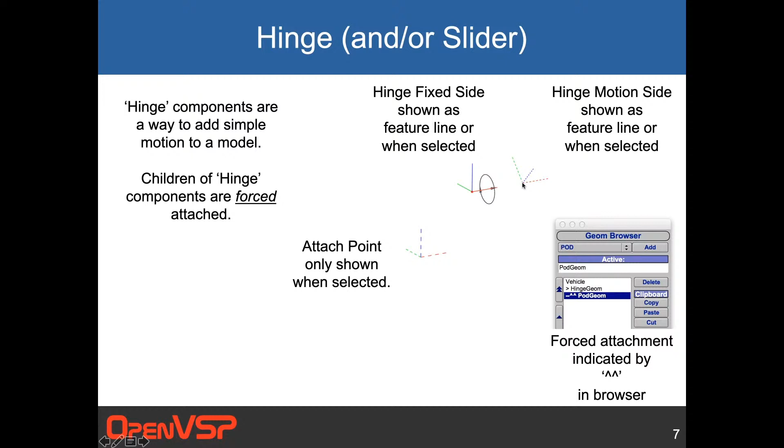And you'll notice in this, the attachment point is this long dashed line. The hinge fixed side is a solid line. And then the short dashed line is actually the motion side of the hinge in its moved point.

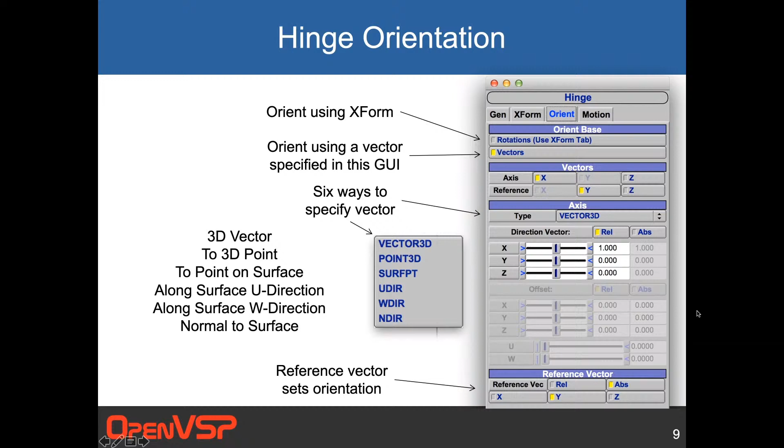Symmetry is another great way to build design intent into a model, and components have many options for single symmetry. So we don't really support multi-symmetry, or at least symmetry about multiple origins, but you can have multiple kinds of symmetry about a single origin. And so each component that you want to be symmetrical, you need to think about, is it going to be symmetrical about its own origin, its parent's origin, its grandparent, how far back of an ancestor, or all the way back to the global ancestor's origin.

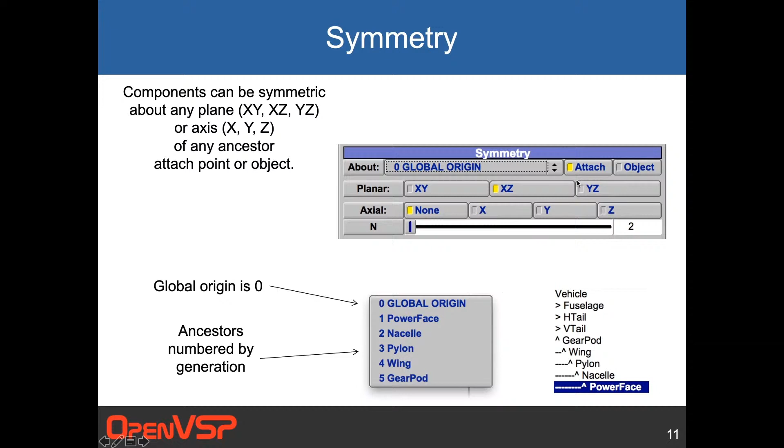And you can use that to build up any level of symmetry you want.

Changing gears a little bit, sets are a really important thing to learn as you're using VSP to do engineering analysis. So you're not just building a pretty 3D model, but you're doing something with that model, some sort of analysis. Sets are a way of organizing a model by purpose. So instead of it being a hierarchy by geometry, we're now going to organize components by what you're going to do with them.

One of the ideas of this is not all the components are needed all the time. The outer mold line, the OML, is needed for aerodynamics, but if you have a passenger inside, or a radio, or an engine represented internal to the airplane, then you don't need to represent that in the OML set. Since you're doing different purposes, when you're doing aerodynamics, you need one set of components. But if you're doing mass properties, then you may need the equipment and the payload and those things that are internal. Different sets for different purposes.

Any geom can be a member of more than one set. Sets get names, so you can name it by that purpose. You can call one the aerodynamics set and another one the mass properties set. And then actions, think of this as a verb. You do things to sets. You take an action on that set.

Sets show up all over in VSP. They're pervasive, and you can use them all over the place. Any analysis you do in VSP, you're going to have a little pull down to tell it which set you want to do that analysis on. Every export option, there's going to be a set. And if you're using the API, you're going to specify which set you want to act on all over the place.

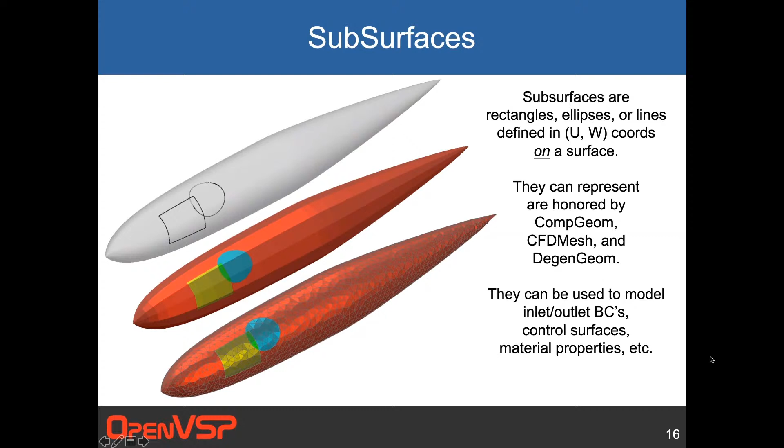And with that, I'm going to fire up a quick demo. I've only got about 5 minutes, so I will try and just show a couple of quick models first. If there's any questions, Brandon, you can ask them to me verbally while I open this up.

We had a quick question that said, are child components automatically added to the set that a parent belongs to? They're not. Right now, when you add a component, it's not a member of any set except for shown.

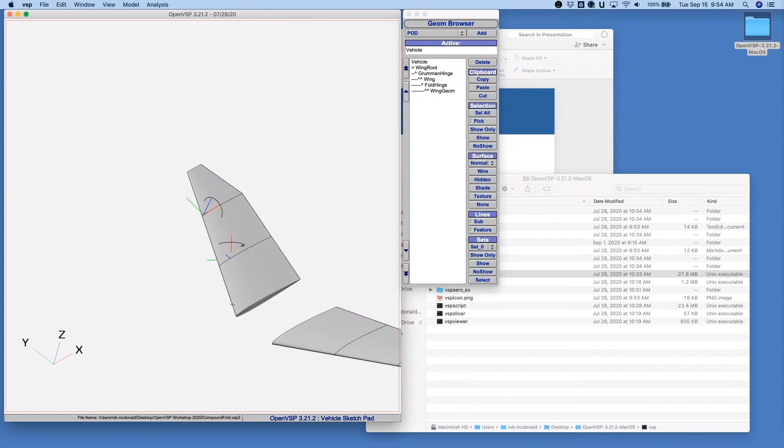So here's that compound fold model that I talked about earlier. First, we'll look at the fold out here at the tip. You'll notice that it shows the rotation axis. So we're rotating about this red axis, the X, and the X-axis goes right down the top of this wing surface. If we look at this fold hinge right here, and we look at its orientation...

We're just using the X-form tab to locate it, and here we've actually translated it on UW. So we've placed it at U of 1, that's all the way at the tip of this inboard wing section, and W of 0.5, meaning all the way at the leading edge. So we've attached it right there.

And notice we've attached it differently, in UW in translations, but the component in rotation. That's why it's still straight and aligned that way. Then we've bumped it up in Z, incremented it half the thickness of this airfoil, so that we came up 0.125 to get it lined up right there. And so we've got that perfectly aligned the way we want it.

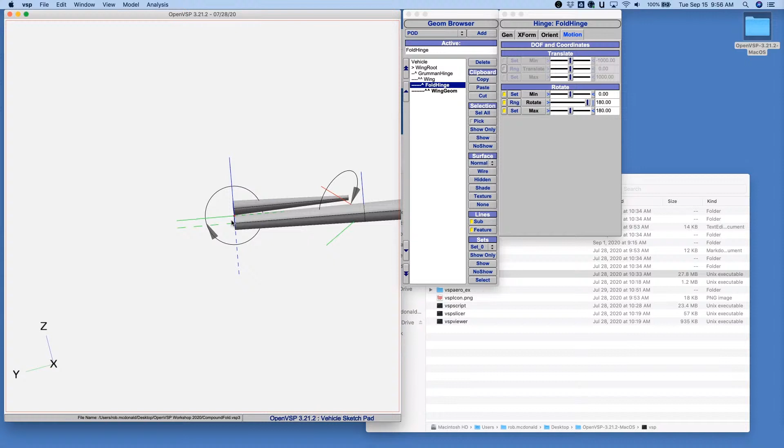If we come out here to motion, you'll see its limits are set to 0 and 180. If we click that range, and as we fold it, we're rotating about that point, you'll notice the dashed lines, which are the moving side of the hinge, and it folds right over until it lays down on top. We want 180. Looks like we could actually go a few more degrees if we wanted to compactly tighten it, back it down.

Now that we've folded that, we can take a look at our Grumman hinge. That's a little bit more obscured by the geometry, but notice we're again rotating about the red axis, which is oriented pointing, if we sight along it, 45 degrees in and down, which is the way a Grumman hinge works. We set this up.

Its attachment point is attached again in UW to the parent, to this inboard section relative to the leading edge. Notice its attachment point is right here. We've translated in X, moving it 0.75 down to the quarter chord, then rotated 45 minus 45 to get an in-and-down rotation.

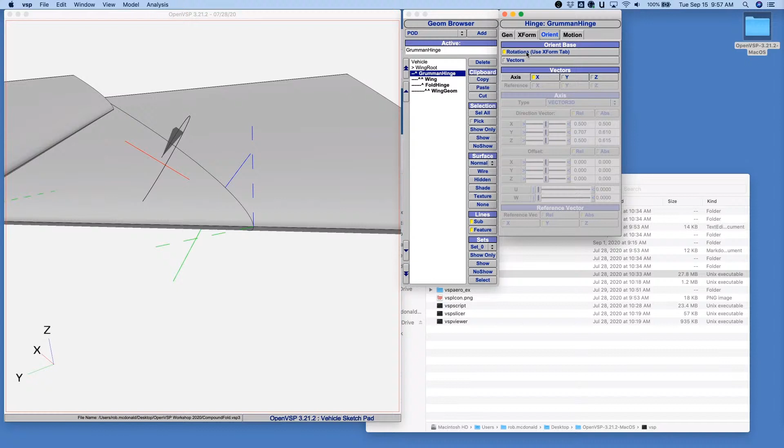We used the X-form type rotation for both of these, not any of the more advanced options. So when we want to move this, we've already set our limits, our min and max, to minus 141. If we click that range, as we rotate back, we're rotating about that axis. This isn't the best view, let me look from the front and down a little bit, about there.

As we rotate it, that tip droops down and folds back parallel, and in this case we've folded it back along with a lot of sweep. That's why it looks a little different than you might be familiar with, but we've folded it back parallel to the body and along the aircraft. So that's using hinges and attachments in this model.

While we're here, let me open a different model that shows some use of sets. I'm opening one of the models that Uber has released of some of the concept vehicles from a couple of years ago. This is the eCRM-003.

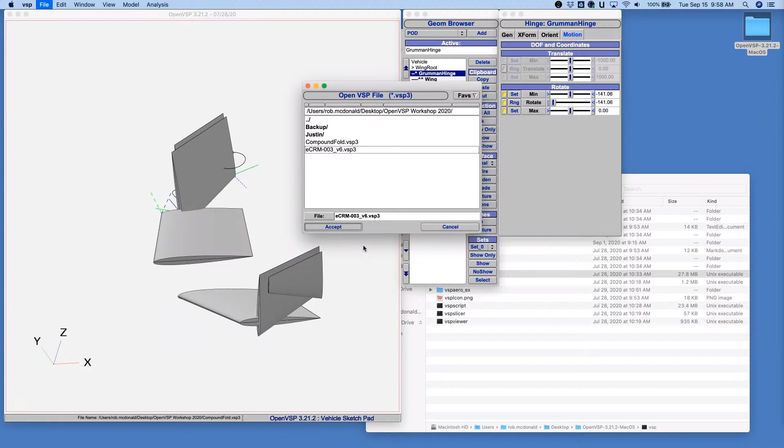Let me shade all of it. I just chose it because it's a model that had sets used from the start.

So here you can see we have AVL, parasite, airspace, and battery. If we want to look at the AVL, we can show only those components, and these are the components that you would then send in a model to AVL. Whereas for the parasite drag, these are the components in the parasite drag model. The airspace model adds the propeller, the propulsion components, and the battery model just has the batteries only.

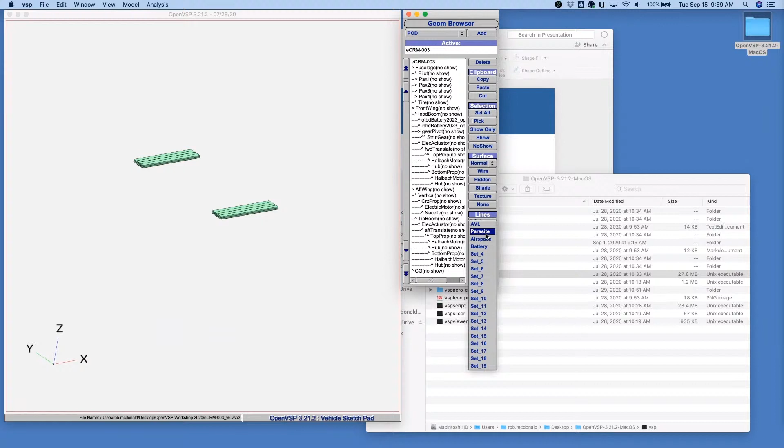So we've used these sets to group by purpose, by function, what we're going to use these for, and then we use that to feed to different models. And with that, I'll wrap up this particular talk.

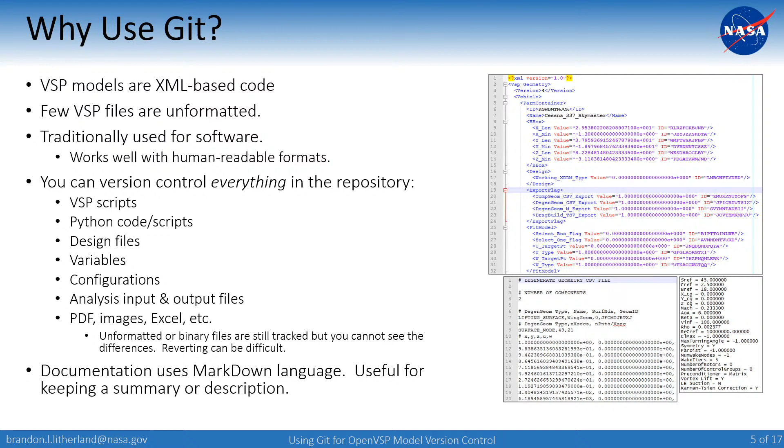The thing is that the unformatted or binary files are tracked, but you don't necessarily see the differences because it's not human readable. It can't do a diff operation between those two and tell you exactly what changed. It just knows that it did. But there's nothing at all wrong with keeping those files inside the repository so that everything's in the right place. And the documentation uses the markdown language, which is very useful for keeping a summary or a description README file, so you can always see what's going on and what the model is about.

So, a bit of nomenclature when we're just talking about things with Git. Branches are basically parallel versions of the project where you can safely make changes and experiment and fix bugs, doing things like that, without having any effect on the master copy of the project. So it's just I've checked out a version of this to work on. A fork is a term that implies making an online copy of the main repository. So instead of it belonging to the collective group, you've taken that and you've split it off and made it a completely different copy. It's not checking out, it's a different operation.

When you clone something, it's making a copy of the online repository to your local storage. So you're going to clone that online repository and it's going to build everything right there on your machine. And when you check out, that's working with a specific branch, or you can create a new branch when you check out.

And one of the really important ones is this term called commit. And a commit is when you say that you want to add all of the changes that you've made up to this point into the project history. You're happy with it, it's stable, it's exactly the way you want, and so you commit those changes to the project. And with a push or a pull, it's either pushing changes from a local copy to an online repository that you have stored, or you can request that people pull the changes that you've made into, say, the master branch.

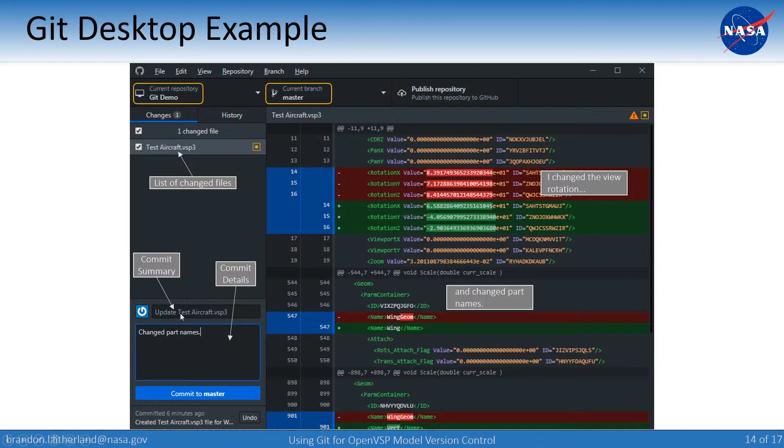So, for an example, let's say that we're working in a repository and we have an aircraft, and it will tell you that you have a changed file here. And over here on the right side, it will tell you exactly what changed, including, say, you changed the name of a component, you changed some camera angles, various things. So it also tells you what branch you're working in. So all of that stuff is included in this window. You simply type your commit summary and all of your details and click commit to master.

And the next thing that comes up is your history. And it tells you what changed. It tells you your 7-digit hash ID, which is actually just a partial of the full commit SHA. And you get your entire history log here on the left. So all of your details are here. And again, you can go back and see exactly what changed.

So in this demonstration that I'm about to do, we're going to open up an example repository. We're going to open a VSP model. We're going to manipulate it a little bit and then save it. And we're going to view those changes, and we're going to stage a commit and then look at the view history. So I'm going to walk you through the process for how to use GitHub Desktop and use a model in a repository. So for that, I'm going to go ahead and escape out of this, and I'm going to bring up GitHub Desktop. So in this case, we're working in my Git demo, and I have no changed files.

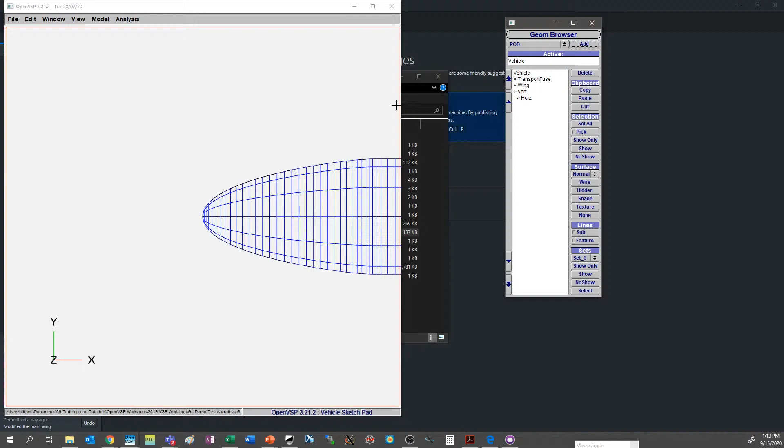And this repository is here. So I'm going to open my test aircraft VSP file. Okay, so here I can make this view a little bit bigger, and we can see what this looks like. I just quickly press F to center everything in the screen and fit, and we can see this model. So let's say, for example, we want to go into the wing, and maybe this is too low of an aspect ratio. We want to widen this out just a little bit and maybe give it some more sweep. Why not? It doesn't really matter for the demonstration here.

So let's give it maybe a little bit more span and maybe a little bit less root chord. And that's not too bad. Sure, why not? And while we're at it, let's give it just a little bit of dihedral. Okay, so we've made a couple of changes, and let's say that we're happy with those. We can go to File and Save. And now, if we come back, notice how it automatically picks up on the file that's changed.

It knows that I changed my view center, but if I start coming down this way, it knows that I changed a little bit of paneling. I changed the area, aspect ratio, the chord, some dihedral. There's a bunch of stuff in here, and it's tracking it. Anything in green is what it's set to now. So you can visualize everything that happened in this model.

So now we can just say that the summary is to modify the main wing, and the description perhaps is that we added dihedral, we shortened the root, and increased span. Okay? So I could enumerate this. I could make it perhaps a little bit cleaner, a little bit nicer, but for the purpose of the demonstration, you can see what we're doing. All we have to do now is commit to master.

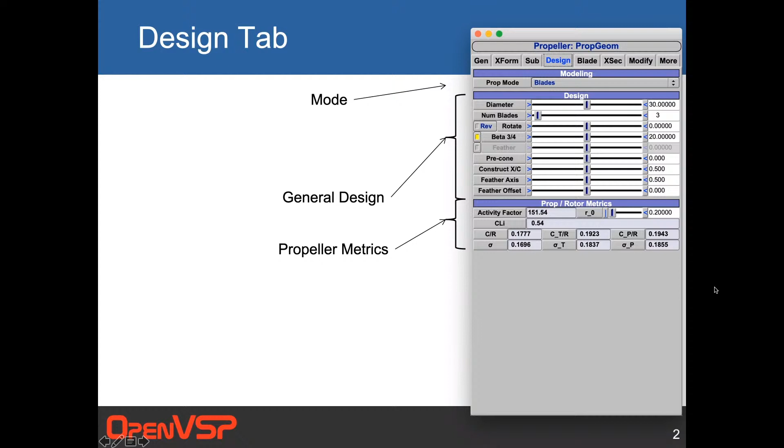Now, this isn't just about visualization. This representation mode also determines what goes to any sort of analysis or export. So when you export the geometry, if only the blades are being shown, then the disc is not going to be exported to that geometry and is not going to be communicated to that analysis. Likewise, if you're in actuator disc mode only, then the blades are not going to go to that geometry. They're not going to end up in the CAD file. They're not going to go to that analysis. And in both, then both are going to go to whatever analysis or whatever export file. So just know that what you see on screen is what you're going to get in your analysis or in your export.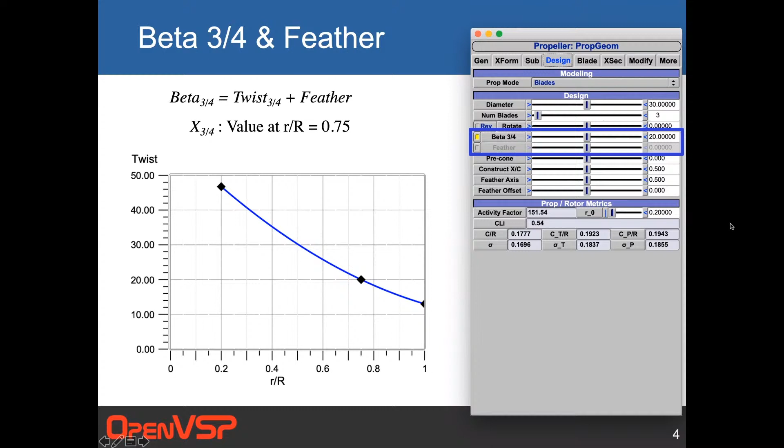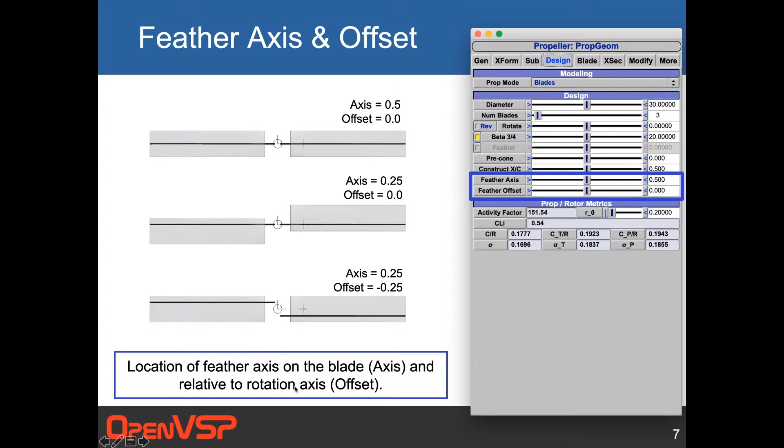Here at the bottom, we actually calculate some outputs. In VSP, you'll notice boxes with a slightly blue background - these are outputs, calculated on the fly but available as parms. You can use them in linking, access them through the API, and do that kind of thing with them. We'll talk more about that later. There are lots of things that propeller and rotor people use to talk about their props and rotors, and we calculate those on the fly based on the geometry as a courtesy.

For propellers, they often work in terms of activity factor, which is sort of like a version of aspect ratio, and also integrated design lift coefficient. So activity factor and CLI are calculated there. For activity factor, you have to specify where the hub is in terms of where you begin your integral, and that's what this R0 parameter does. The typical definitions are either 15 or 20% of the blade R over R, and the default there is 20%.

If you're a rotor person, you often work in terms of the average chord or the solidity, which may be the geometric average, the thrust-weighted average, or the power-weighted average. So the power-weighted chord, thrust-weighted chord, and solidity are all output here in these boxes, and this is always up to date with the rest of the geometry of your model. This is a per-blade chord and a per-blade solidity, I believe - I'd have to double check that. We might multiply them by 3, but I'll double check.

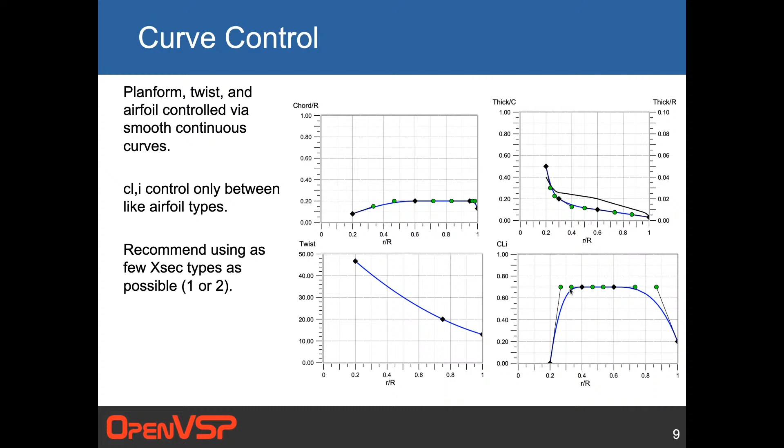There's a lot going on for the blade curve control, but you come to the blade tab. Up at the top, there's a selector for which curve you're going to be working on. Right now it's showing chord. And then there's a control for the type - is it a linear interpolation or cubic? We'll talk more about that.

Then we have a nice big window for the interactive curve editor, where you can actually drag and drop the control points around to control that shape. You have some options for splitting a curve to basically insert more control points without changing the shape, so if you want to do local refinement, you can do that. Or likewise, you can delete control points - if there's too many specified, you can go through and thin the crop.

Down at the bottom, there's a fairly complex looking GUI. It's actually simple in practice for editing the control points, where you can go through and, if you don't want to just drag and drop imprecisely but want to very precisely control the numeric values of control points, you can type those values in there. And over at the very right, there's an option where you can enforce continuity on some of these types, so if you know you want a particular control point to be smooth, you can click that G1 button to force it to be smooth.

Now, the different planform curves - there's a lot of curves that you can edit: chord, twist, rake, skew, sweep, axial, tangential, thickness, and CLI. So there's a lot going on here. All of them that reflect the planform are, again, this is the distribution of a blade, and they're described here in this chart.

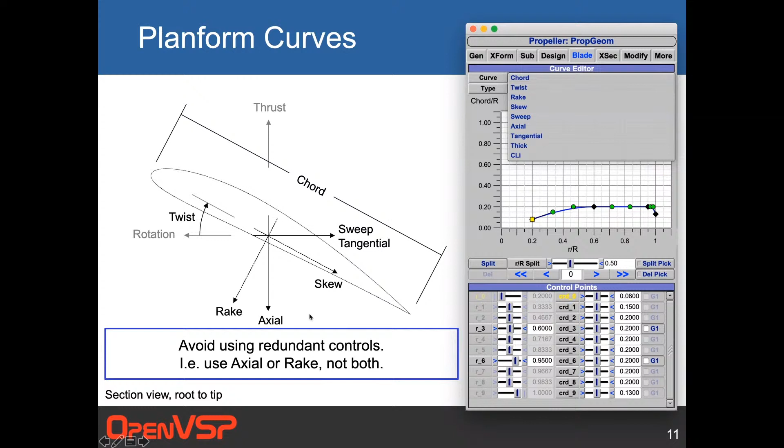This section, again, it's a sectional view from root to tip. A little bit more on the difference between sweep and skew and rotation. Here we're looking from the rear, looking forward, so we're behind a prop looking forward. This is a default prop that rotates clockwise. In this case, sweep is going to move this section.

If you sweep the tip section, it's going to move it along the arc of rotation. It's opposite the direction of rotation for positive sweep, but it'll sweep that back. The real developed disk and the actual radius will not change with sweep, that'll stay the same. However, both skew and tangential are more of a shear, and they translate this section in the vertical direction, so they will actually change the true diameter of the blades. We don't update the disk and we don't update the diameter parameter, but they will change the actual real diameter of the blade. So be careful with that. You can get yourself into trouble with extreme values of skew and tangential.

In a similar manner, rake and axial actually move the blade section in a linear way, like skew and tangential. In this case, it would be in and out of the plane of the screen. They don't change the diameter because the diameter is still of the projected disk, but they do change the blade length.

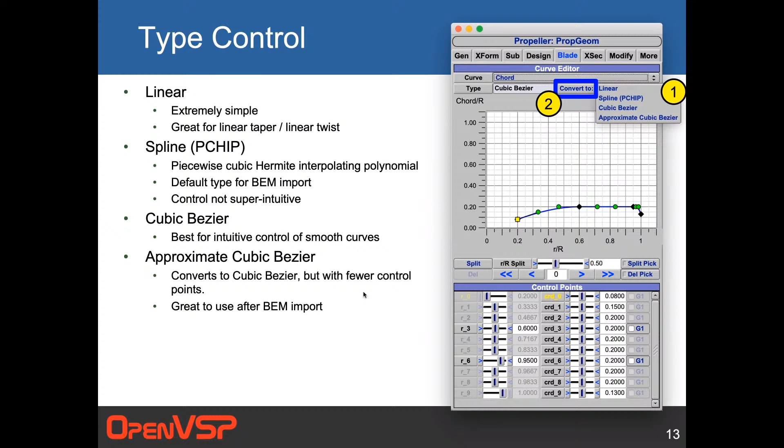There's this option to do an approximate cubic Bezier. What this does is it takes whatever you have, which could be a cubic Bezier with many, many control points, or a PCHIP with many, many control points. First you choose approximate cubic Bezier from the pull-down, then you click the convert button. When you click convert, it's going to approximate your curve with a cubic Bezier with fewer control points, and then change that mode to a cubic Bezier. This is great to use after you do a BEM import and you've got a ridiculous number of control points and your model's really slow. You do this approximate cubic Bezier and it's going to be better.

Curve editing in general in this drag and drop area is pretty intuitive. One really cool thing is the model does not update until you release the control point. So if you grab this green dot or this black dot, you can move it around and see what's going to happen to the distribution on this screen, and it doesn't update the whole model until you let go.

If you want to split a curve, you use this row. You can either dial in where you want to split it in terms of R over R, or you can do it with a click to pick, where you click the split pick button, and then the next place you click, it'll split it nearest the mouse point. So you can just click to split.

Likewise for deleting, you can choose by index, rolling through this as the little yellow box moves and tells you which point. Then when you hit this delete button, it'll delete it. Or if you want to click to delete, you can click the del pick and then the next one you click on, it'll delete. Down here at the bottom, you can adjust all these things precisely with a regular input like any other VSP component.

Things that you can't change due to the math and whatever's being done will always be grayed out. So things you can't change will be grayed out, things you can are white and bright. And if you want to set that G1 continuity, click the box and some other things will gray out.

On the XSec tab, it's almost identical to that for a wing, so I'm not going to spend too much time on it. There are a couple of tricks. If you want to change the hub cutout, the root section of a prop blade, the way you do that is you come to the 0th X section and you change its radius. So you change the 0th section R over R to change that hub cutout. That one's tricky. People miss that one a lot.

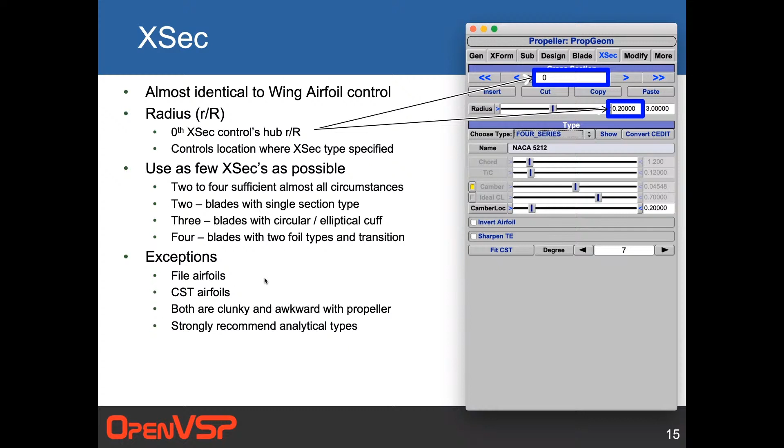And maybe 4 if I knew that the root section was one blade type and the tip was another, and then there was a distinct area in between where things were transitioning. So there's really, again, as few as possible. Don't go crazy here because it doesn't make sense in a prop. A couple of exceptions. If you're using file airfoils or CST airfoils, you could use more, but both of these are kind of clunky and awkward with the propeller. It's not ideal. And so for a prop, I really recommend you use the analytical types and you use as few of them as possible.

The More tab includes folding control as well as tip treatment. The folding control allows you to put in a folding prop where it can either fold like a model airplane propeller that goes back along the body. It can fold like a Stemme S10 motorglider that folds in the plane of rotation, or you can do a complex fold like the folding props that Brandon designed on the X57. You get to set the folding axis, both its position and its direction. So a vector and a location, as well as the angle, and all those are set with these parameters up here at the top.

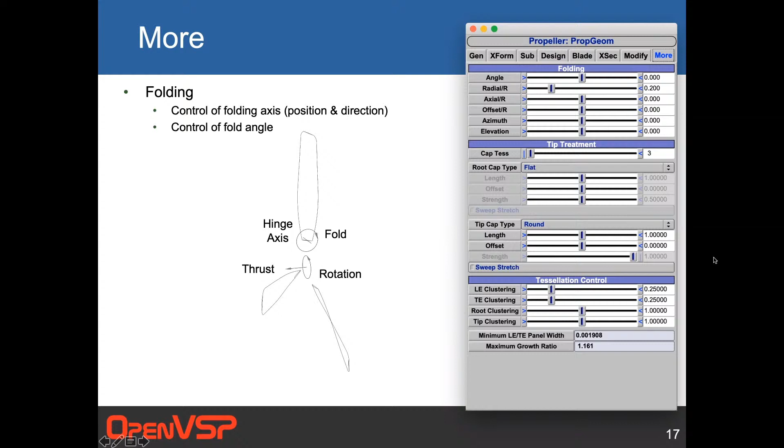Below that, the tip treatment is identical to the way a wing treatment is controlled in terms of rounded or flat tips. So that should be very familiar. And likewise, the tessellation control for clustering should be very familiar. Clustering is controlled over an entire prop. It's not section by section. It's the entire thing at once, which is generally pretty nice. The resolution itself is on the general tab. On the gen tab, the num-u and num-w control that overall tessellation resolution on a prop.

Propellers have the neat ability to do a boundary element method style file for both import and export. It's not in a format that exactly goes into any particular BEM code. The idea is that this file just contains the information that a BEM code would need in a very simple file format to work with. So you should be able to convert it to whatever your favorite BEM is, whether it's something you've implemented in MATLAB or whether you're using Xrotor or QProp or OpenVMT or whether you're just doing a spreadsheet.